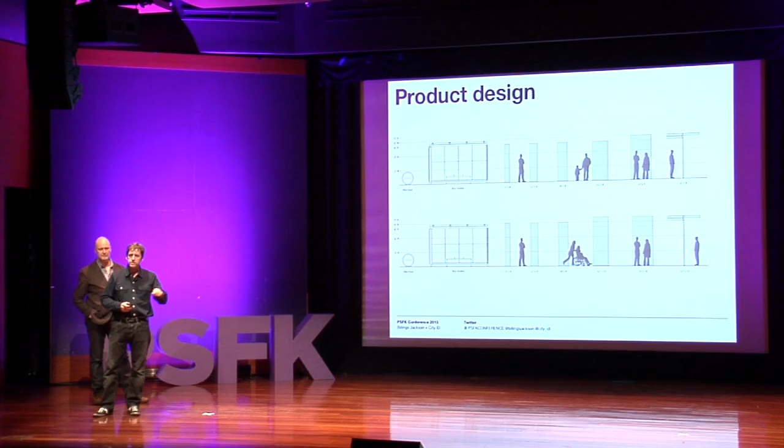When you go out, when you leave here and look into the streets, just look a bit deeper. I drive my wife crazy because I spend my life looking at bus shelters and light poles. Our streets are cluttered with equipment.

The challenge here was to come up with something that was really quiet, because the information is the hero. The work that Mike and his team are doing in terms of developing that information is the most important thing for you. It's what you want. So we spent a lot of time trying to keep the product as simple and clean as possible, and something that could reflect this. It's quite a tough product as well, which kind of reflects New York streets, I think.

So this is just to give you a quick idea, this is what you're going to see in a few weeks' time in New York. You're going to start seeing them pop up.

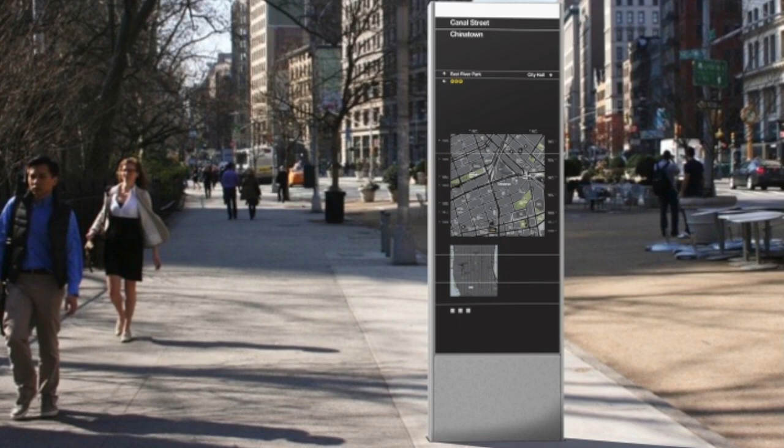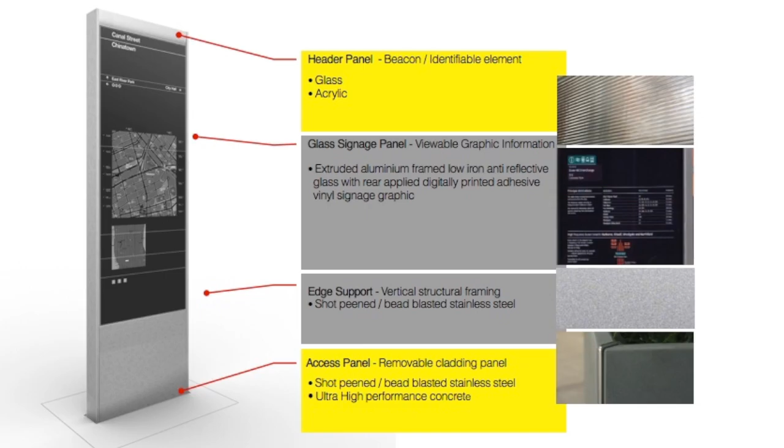These are some of the different sizes that we tested to see how they looked. You can see it's a very simple, clean line. We have a little beacon at the top, which is like a kind of lighthouse, just so you can pick it out in the street. But the rest of it's just a very simple stainless steel structure, and then a little access panel at the bottom. The most important thing is the glass facade that has all the information in it, which goes right to the edge.

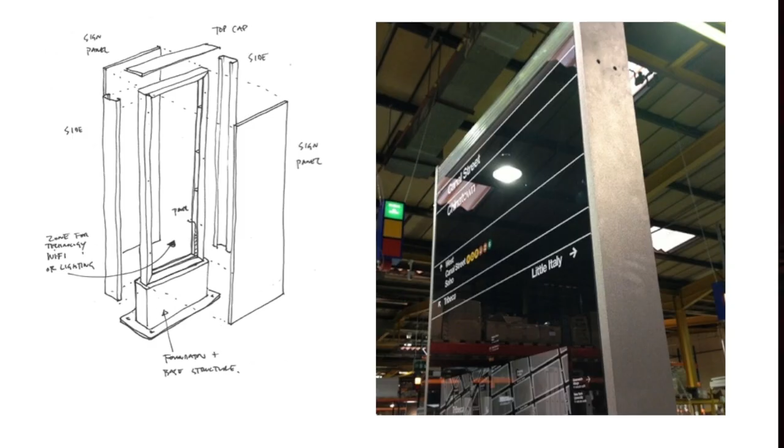And this is the prototype. Prototyping is extremely important. If you're making anything, anyone who hasn't made anything, always test it, always try it. This is it being trialed in the factory. And we tested every element.

This stainless steel is only 5 inches wide, so it's going to be a very slim element. And we kept the glass going right up to the edge. Now that will be a detail you'll hardly notice, but for us it was really difficult to achieve, to get the glass right up against the steel.

When we ran the tests on it, the original thickness of the glass was going to push it out to 5 or 6 inches. It would bend in the negative pressure of the wind. So we made it a little bit thicker, which actually was a bonus. It's going to look even better. It's got a sort of a half-inch thick piece of glass.

This is shot peened stainless steel. This has all been tested in order to see will it stain, will it rust, will anything happen to it, because it's got to survive in New York through all the various conditions, and you've seen some pretty horrific conditions in the last year yourselves.

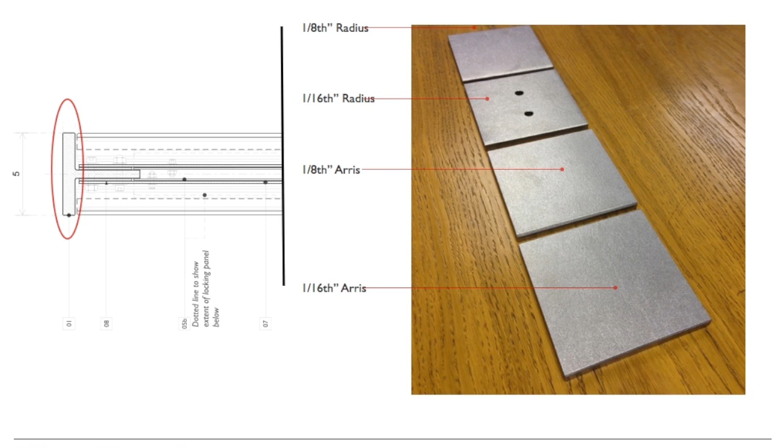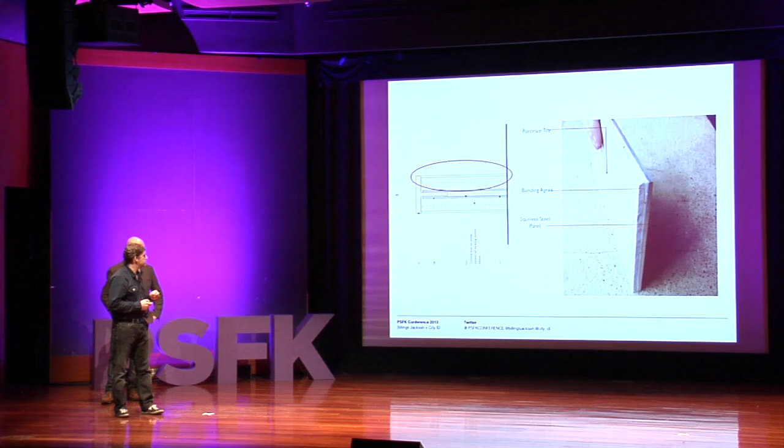At the base, there's a ceramic panel. This is an industrial product. It looks really good, looks kind of like concrete. It's normally used for truck delivery areas, so it's extremely strong. I'm hoping no trucks drive over our product, but that can happen.

This is just a quick indication that all of these parts are made from a digitally formatted drawing converted to CNC, so all of the products are ready to go in a virtual form. And here's the prototype, and I'll just give you a quick look at the video. We're very excited about this because they just arrived yesterday, the first ones.

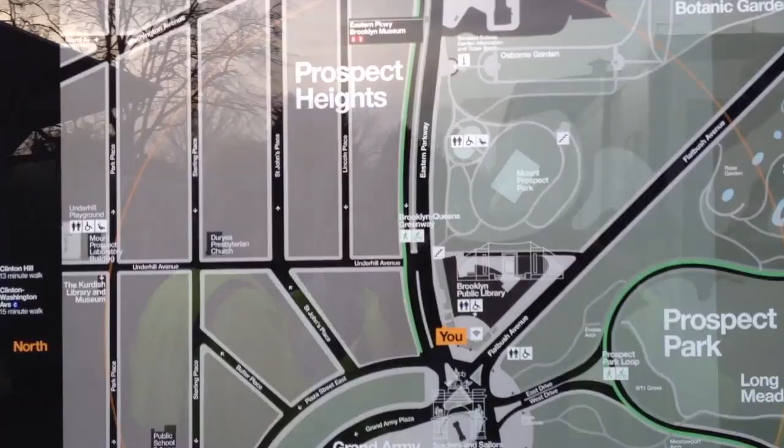We are looking to extend the system over a period, so the investment the city's making is not just for one mode of transport. It will become multimodal and whole journey. As part of that, the mapping area in the core there that you're seeing is the first thing that we're evolving, along with all the data sets, but it's going to roll out across the whole of New York. It's already going into the streets.

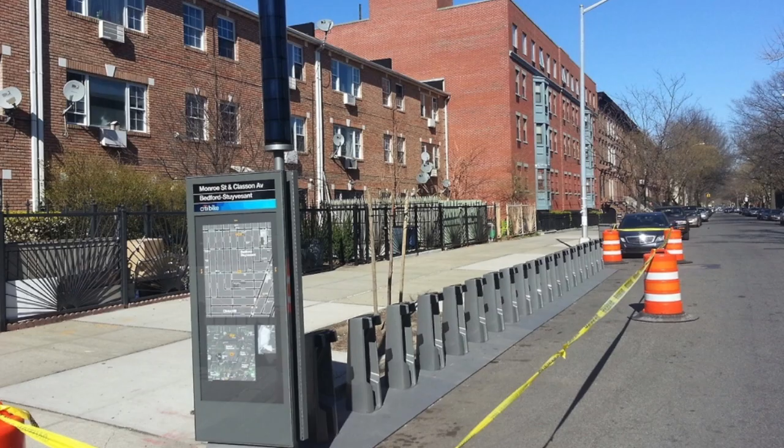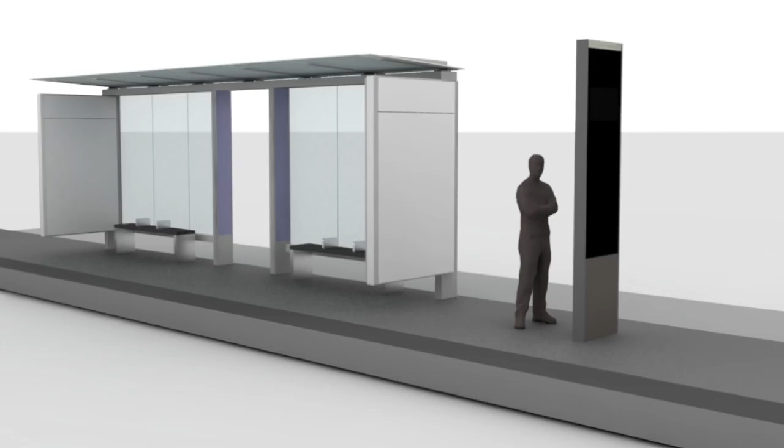Some of you may have seen it live in Brooklyn, into bike share. The wayfinding system will carry through as a bonus to bike share into something like the 600 odd stations ultimately, 10,000 bikes going into the city. Again, it gives you an idea, it's the same language. We're also looking at bus systems, expanding it through to the SBS, that Select Bus Service Network, within the next year as well. So again, a comprehensive rollout.

And beyond that, we're engaging with partners to think about how we can expand it through to print and digital services, creating an open platform using the data, the resources, the planning guidance, and the identity to evolve it. So any partner could ultimately use parts of the system in their own right to generate information. At the core, people like DOT would use 100% of the system, other partners some of it, and third-party providers perhaps just agreeing to use the content and other elements of the system.

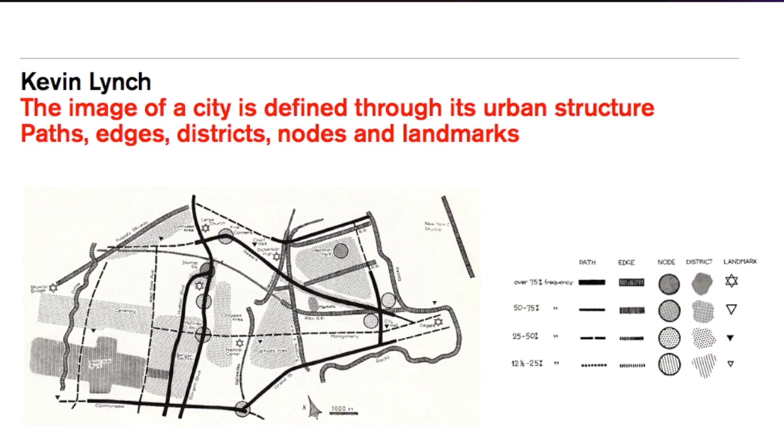We've taken our inspiration for this project from a guy called Kevin Lynch. Some of you may know him. I'm not going to recommend my own book today, but you should read his—it's called The Image of the City. It's really interesting, and for the first time in my experience, back in the 50s and 60s, he was a guy that really started to push boundaries. He was kind of an urbanist, an environmental psychologist. But from his perspective, he looked at cities through people's eyes, and actually looked at how we can deconstruct cities in the way they're structured and formed, in order to develop a language that enables people to read and understand them better. So we've taken a lot of influence from that.

And whilst we're urbanists, we work with architects. We don't just deal with buildings. It's actually the people interaction in places that really drives us.

So this whole thing about legibility and city image—few cities are inherently legible. What Lynch did was look at the constituent parts of cities: its landmarks, its nodes, its major hubs in the city. But what he didn't really foresee was the information age, and the way that information can act as an overlay to augment your experience in places.

Part of our philosophy is designing for people first and foremost. We look at not designing for one type of user in particular, but designing around the myriad needs and capabilities that people have.

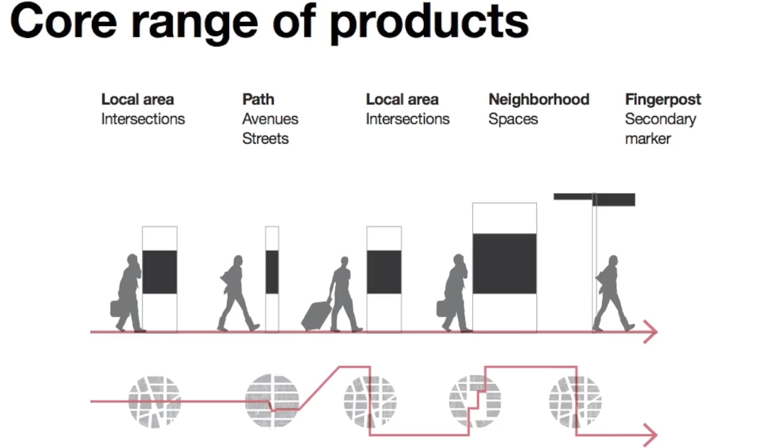Behind it all, we're building a digital platform to service any number of given information parts. London's been through a similar system. Now it puts something like 20,000 products and services from a similar data engine with design resources to work with it. We've evolved a range of core products from local area to path products on the avenues and streets through to larger neighbourhood products.

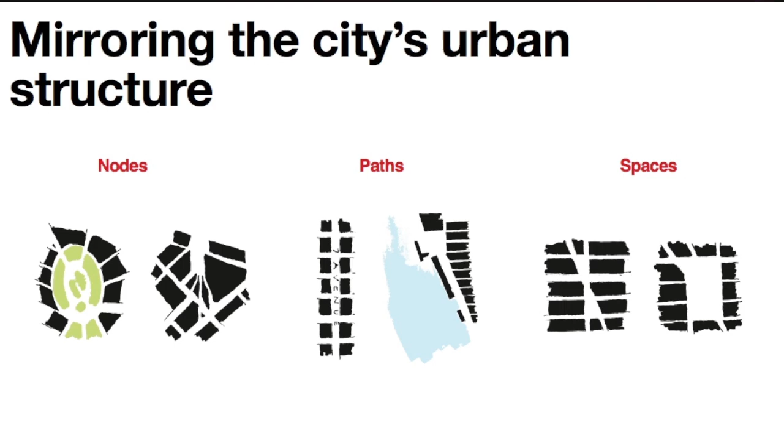They really mirror in scale and size the aperture that you're in a particular space at any given time, from major nodal spaces to, as I said, narrower products that sit within the major avenues and streets. There are core products related to it, but we're aiming to extend that as a fully featured system to move across to bus services, to bike share, to other products and services.

We've been through a whole process of building this in terms of planning first, thinking about user needs, not starting with graphic design or what something looks like, but how something functions and how we read the city and reinterpret that back, almost as a mirror to people in many ways. We've taken a very user-centered design approach. It's featured through every aspect of our designs in terms of talking to people, understanding needs and what's relevant and what makes sense to people.

Crucially, everything we have to do has to be evidence-based. It has to be grounded in what people need. Otherwise, it will be superfluous or won't be understood and won't be used. It'll become the next level of street clutter if we're not careful. We've been through a process of diagnostics and user testing.

We've evolved forward-facing mapping for the city. Again, it's something that we've learned from other projects. But broadly, the view is that as you're looking at the city, the map mirrors the view in front of you. It's otherwise called heads-up mapping for sat-navs in cars and various other things as well.

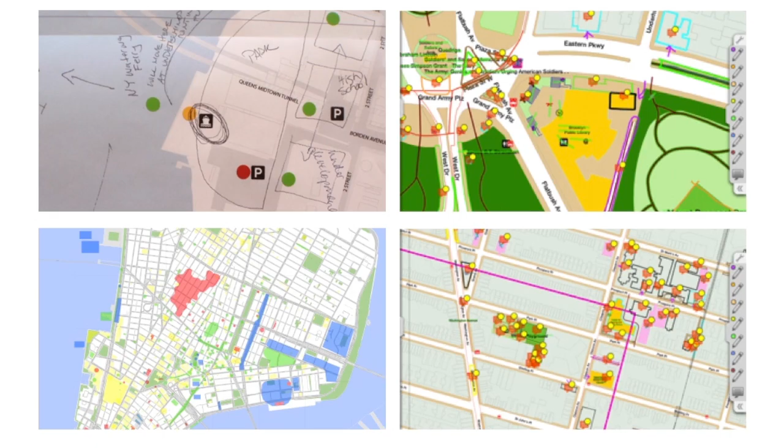We've gone through a whole process of building data and content, agreeing all the area names for both the boroughs and neighbourhoods and particular areas of the city. A huge exercise in its own right. We've drawn data from a host of different sources. DOT, one of the government agencies, has a lot available, but we're creating really what is an open source platform for the city and for its partners.

We've started to evolve probably the most comprehensive and detailed mapping system probably seen in a city anywhere in the world to date. And this is just the start, where we're working out from Manhattan to a much wider area at the moment.

We've evolved a graphic standard working closely with Pentagram to apply across not just pedestrian information systems but a whole host of products and services that will feature from the first point of your journey through NYC and Co, right the way through to information you see in hotels and other environments.

We've designed the set out for a core product language, and we've designed what we feel are very functional but very beautiful maps. There's clear beauty in very clear function to what we're trying to do here - identifying where you are, walking distances, off-map directions.

This type of product will be located in major streets and avenues. And as you get into larger spaces, you'll be greeted and met by larger products. They're all double-sided as well. Very clear, very New York. The lineage and graphic language partly grows out of subways, so it feels quite familiar and should feel quite familiar to the city users already.

Different scales of maps are used to give you broader overviews of the city. It also incorporates information for cycling and other material. And we've gone through a whole process of network planning - all these activities have been ongoing over the past year to actually start to think where the system will be.

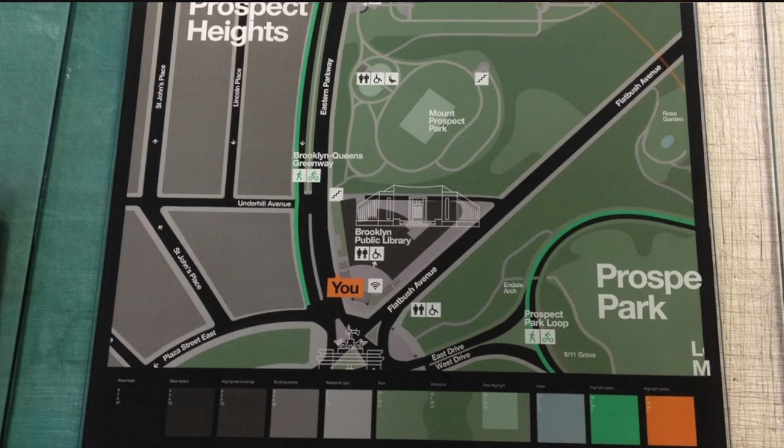We've gone through a process of prototyping for colour and function to get things right, and we're going through a manufacturing stage at the moment for the products. Watch this space - it's very exciting in terms of how it will move forward. Thanks very much for your time. Thank you.